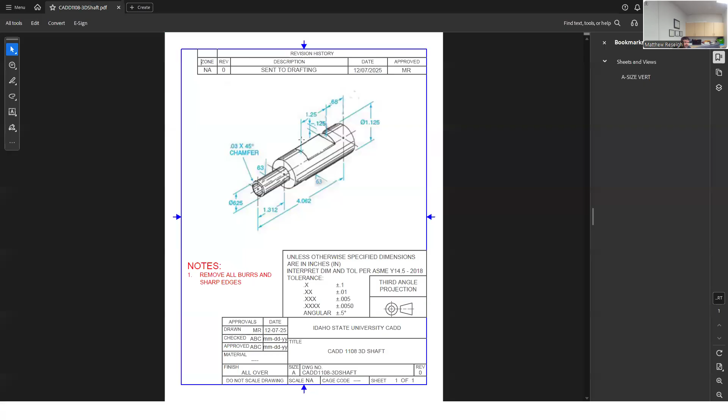So it may or may not have all these dimensions, and I probably will use a few different ones. So I'll just start modeling then and see what I need here. Let me get back to these. There we go. Good, yes good. Okay.

First thing I'm gonna do is just change my line types in here, right? Because I will have had these new MD layers, these model layers that have been created for me. So let's just at least put that to the right line type. I'll do a little bit of line management here, layer management I guess.

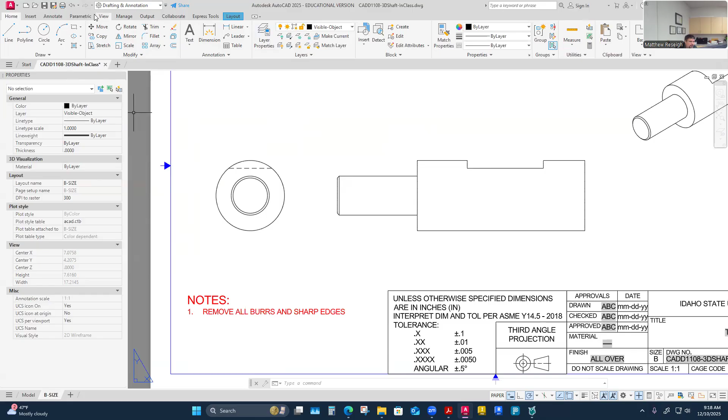I'm just on my annotation tab, not that you have to. I must have been doing some 2D drawings last, so I'm on my drafting annotation tab, which will be fine. I can get to my layers here, but you can always find your layers palette over on that modeling tab too, right? So all I want to do is change these colors and line weights for hidden.

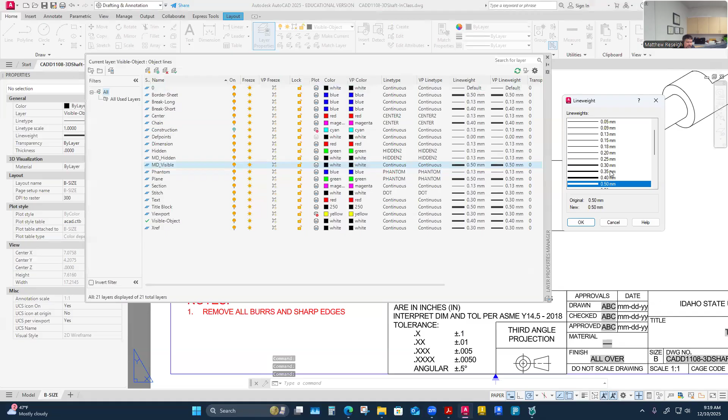I'll turn them down a little bit. That's a 0.13 would be the size for that. And then these would be points for the visible on that would be a 0.4. So just a couple changes there, and then just one color change for hidden lines. And I think that's the only lines I really have in here. Yes, I think so. Ah, that looks better.

Yeah, I'm just matching the other layers that are in there, that are hidden and visible. Yeah, and

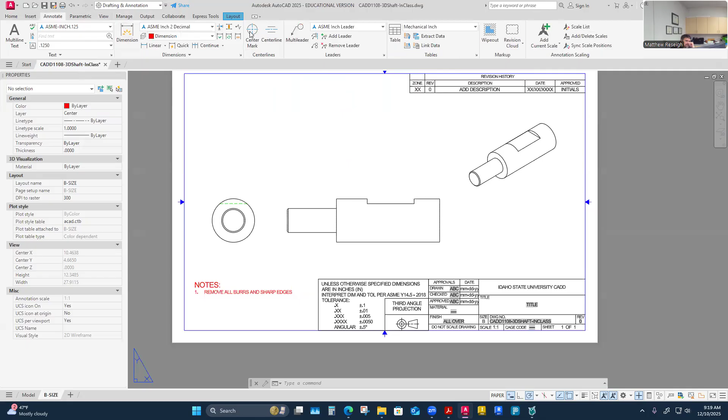Then I'll put some center marks on this thing, right? So I'm gonna do center marks. Manage output, what do I need? Oh yeah, I need annotate and I need a center mark. So there's that center mark, and I just need a center line.

I don't have a full line segment, so I'll just snap one in here. That's the axis of the shaft there. And I'll pull it down to the ends. Then I'll adjust their ASME extensions to be 0.25.

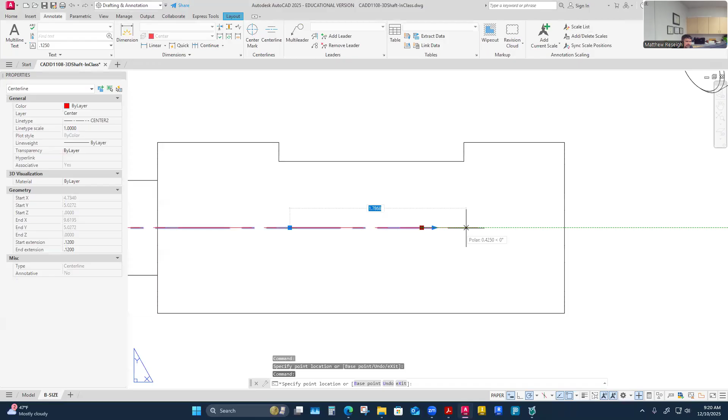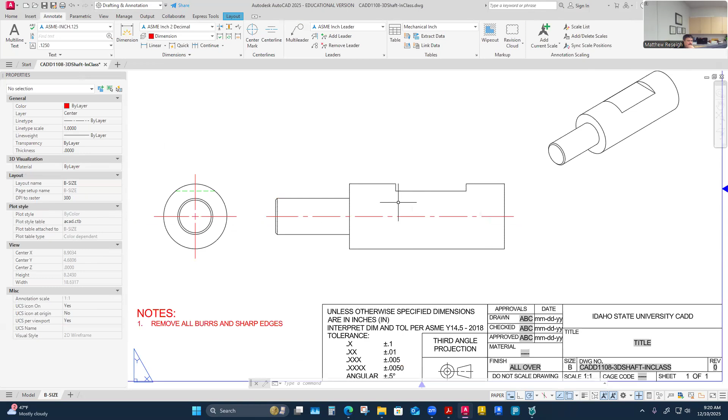Right, and this one, I'll adjust its extensions. Got it, okay. And then let's just worry about some overall dimensions here, right? So I've got an overall diameter, so diameter I'll put in the rectangular view. So I'll probably make myself a little more space here. It's good.

So I'm going to dimension the diameter here. This is the diameter of our shaft. And then if that's not the right dimension, I'll adjust it because it's really says it's 1.125. So I'll take this out to 3 decimal places for that particular dimension. And I need to add the diameter symbol in front of it.

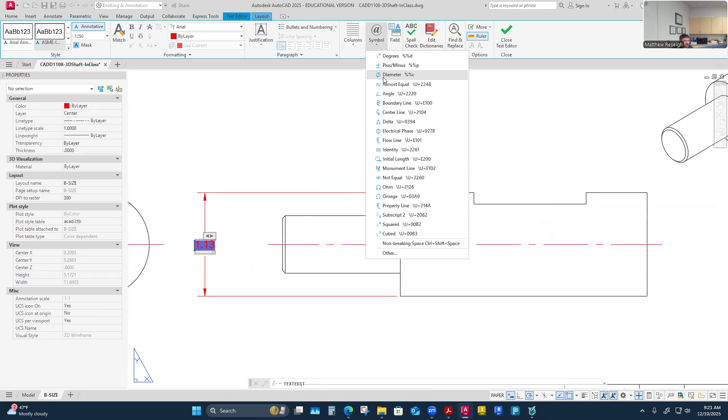And adjust its accuracy, right? I think we just have a few that might be 3 decimal places here.

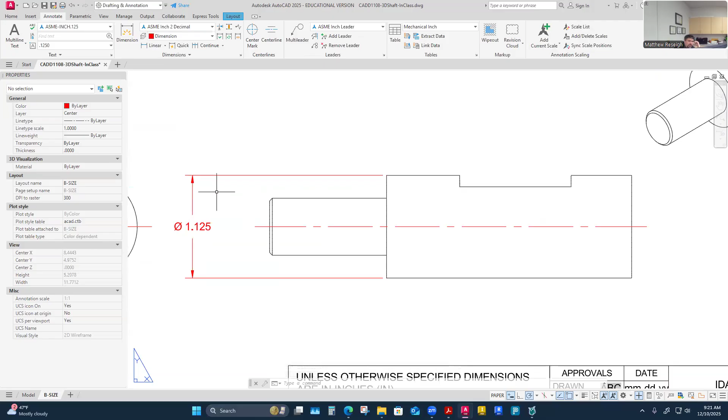Then I need the diameter of the smaller diameter as well. This one. Do it in the rectangular view as well. .63, what is its dimension actually? .625. So it'll really be the same precision as that last one.

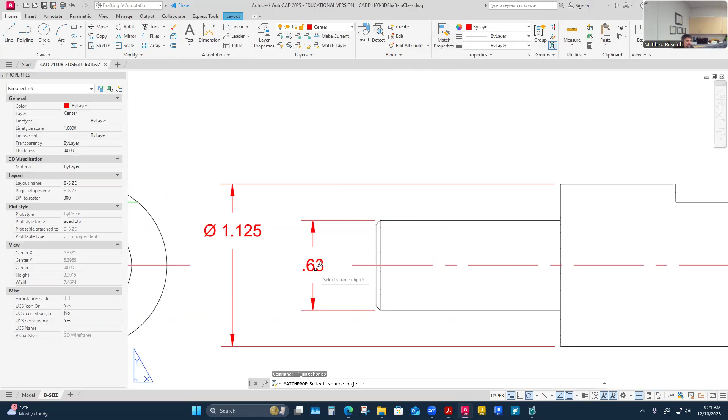Am I doing what? Oh yeah, I probably need to get this not spaced and add it here as well. Yes. I agree there, should not be a space. Just slam it up there like that. Yeah, that looks correct.

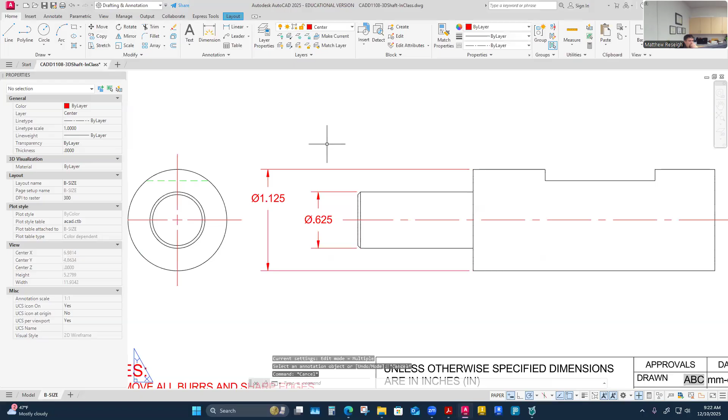And I just need the overall length. And I'll also, this is the only view I have that, so I'll put that in here, just on the up above it. Sure, above it or below, it's fine. Maybe I'll put it below it. I don't know, I'm just thinking I'm going to have some dimensioning here. I don't. I'll change it if I don't like it, but I'm definitely going to put it in here.

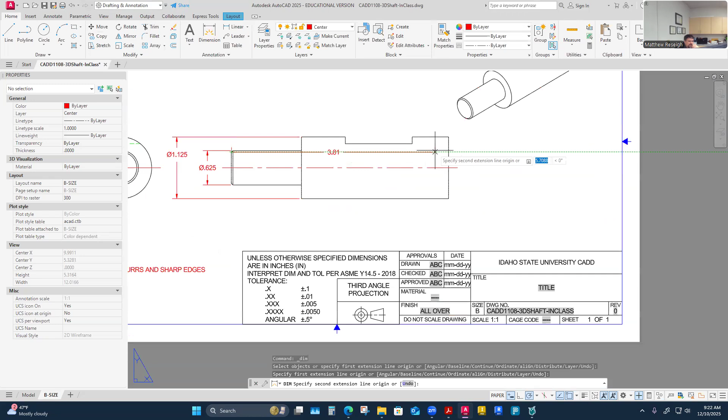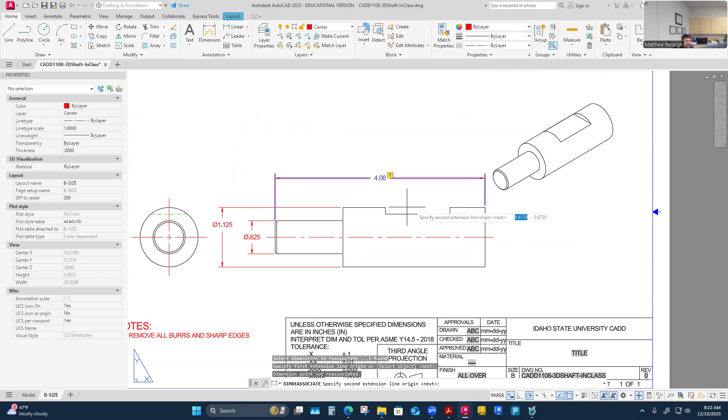Try to adjust this to the right point here. Doesn't like me. But I do like where that one's taken better.

What is the precision of that one? It's actually just 3 decimal places again. So I'll do that, so I'll just match those properties here. I think I can just match these properties. 3 decimal places. Okay, looks like I could have used a 3 decimal place dimension style. That's okay, just keep going.

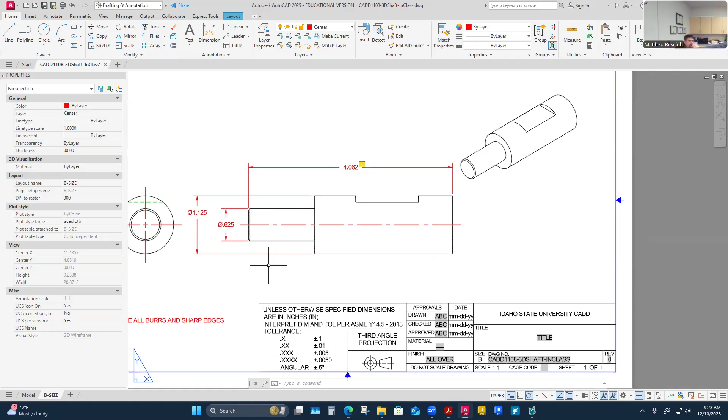So that's overall, that's overall diameter in those areas. I guess overall size 4.062, overall diameter 1.125. Then I've got now I'll start thinking about features, I guess. Feature on the small shaft size is 0.625 in diameter, and I'll put its length in as well. So I think there's a couple different ways I could do this.

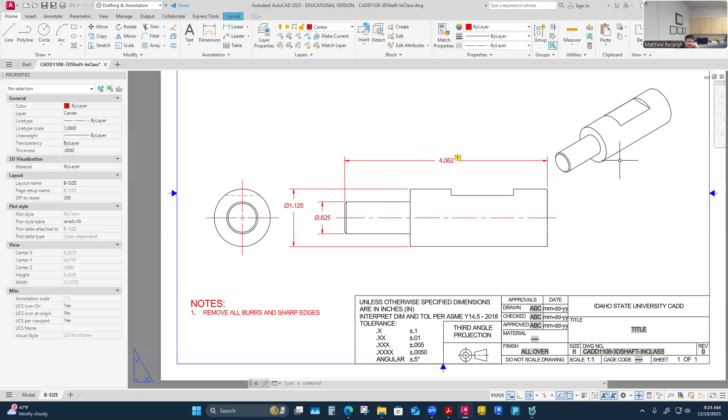Depends on which is critical here and which one. This is definitely a pretty good place to pull dimensions from. It's a nice flat surface on the back of the shaft. Even I could pull a dimension from here. I could use this surface right here as a datum as well, or I could even use this surface here too.

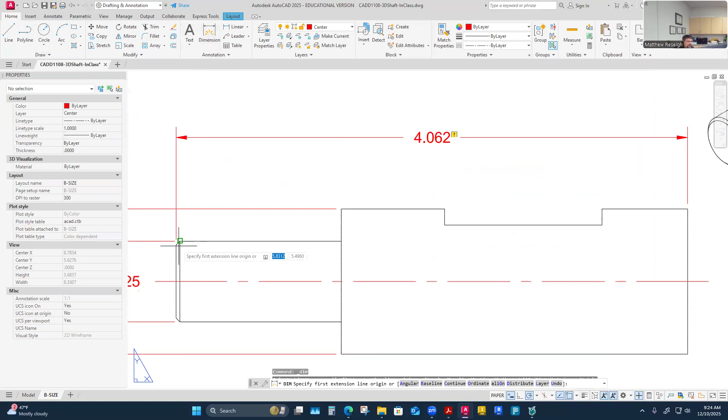So I feel like I can pull left to right or right to left a little bit on this. And I think it might be nice to... what I'm thinking of is kind of the size of this right here, and whether I just plop this. It might be like your intuition would be, well, let me just plop this dimension here, or maybe even above it if that's where I'm putting my dimensions. But something like this to here is what I might want to know.

And I could say that this is pulling from this end surface this way, and that's my datum there. And I think that's okay. I don't want to say which one's better, right or left. This is a bigger surface, so maybe that's what makes it a better datum to pull from. But I think it's arguable that either one would work.

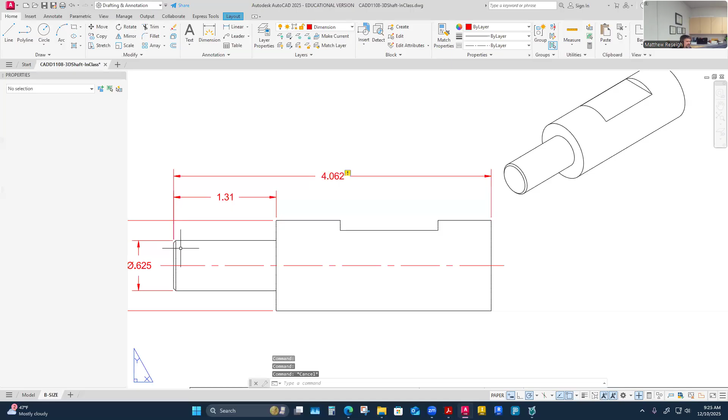So I could view that I'm pulling this dimension from this front face as well, and I'm pulling this dimension from this front face. So I'm using this, even though it's the littler surface, as my datum dimension, maybe.

It's also 3 decimal places on our print there, so it's another one. So that's its length, and I've got its diameter, and I've got the length of the overall and its diameter. I really haven't applied a length to this yet. I could figure it out between those two, or I could give it.

So maybe I'll give it. It's kind of a chain dimension, but it's not a chain dimension that's going to be like 15 different chains, but it is a 2 chain dimension, which I think I'm going to be okay here, like this. 2.75.

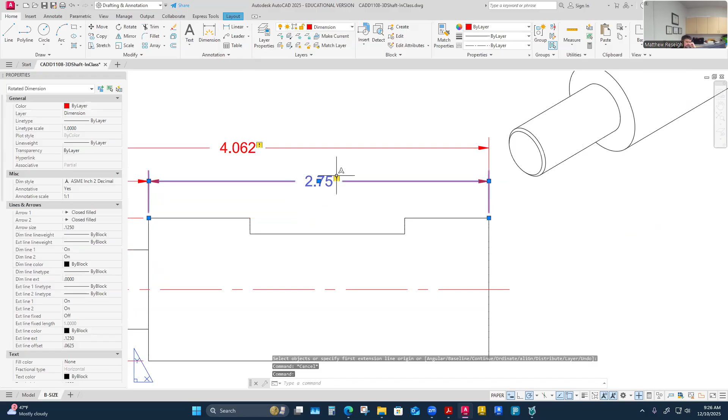I feel like one of these might become this gets into the situation where if I knew which one was more critical, if it's more critical that this is this length, then this becomes the primary dimension, and this one might become a reference dimension. But right now I don't know, so I think I'll just leave it.

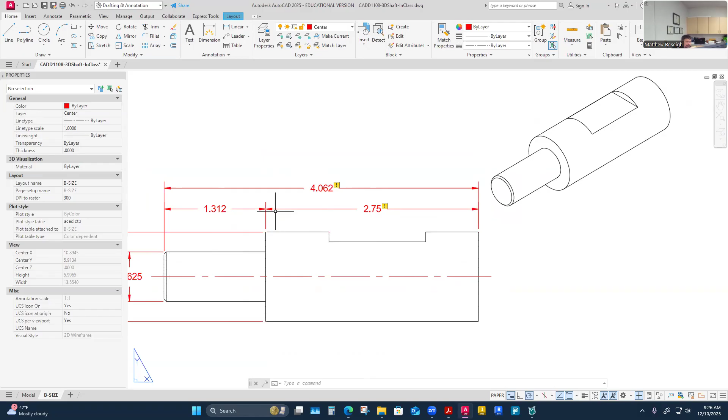What it does is it saves me from having to do a little bit of math, right? Like if technically I have that dimension, I just would have to do some math to figure it. And then I would just have to determine if this one is as critical as this one, or maybe they're both critical

and I might choose to pull them both from the same datum. I don't know. I'm going to leave it like this, kind of as a chain dimension that I have it.

I wasn't given it on the print, and it was kind of something that I would have liked to have had when I was actually building it myself in my model space. I had to kind of do some figuring, or I kind of drew, and then I came back up. And I didn't have that dimension, so having it is helpful. Knowing which one is the most critical one is also helpful, but you have to know the parts' relationship to know that. So at least I've captured that.

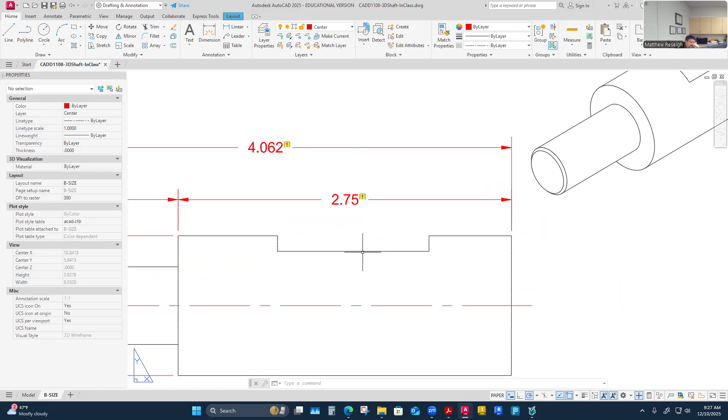And then I'm going to think about these others. So now I'll just keep focusing on this part here and its features. It has this slot cut in it that we know we cut across here. So I think I'll go point to point for those, and maybe from this end here. But it's really me establishing both ends of this part as kind of critical hold points, but not necessarily till I decide that later.

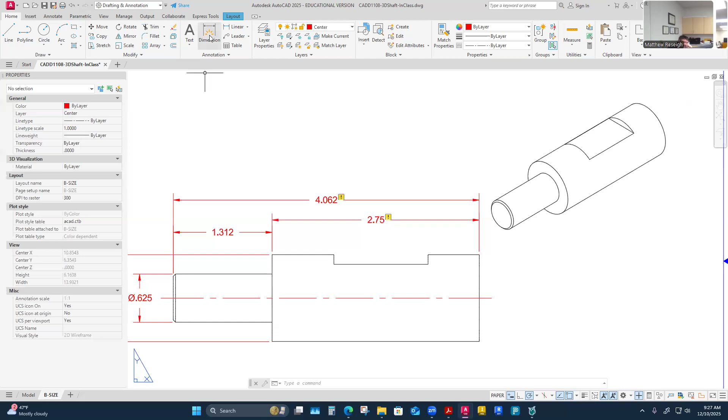So I think I need to know this to here if I'm using that back surface as a datum. So there's one, and I'm going to pull this one to this one. That's my other dimension here.

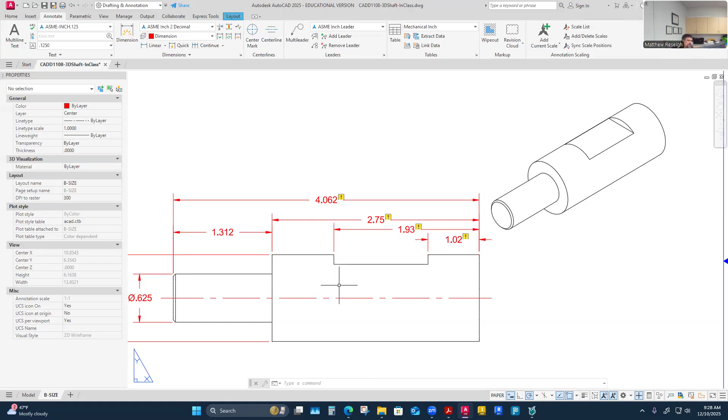Of course, my mind's going crazy. It doesn't like any of my dimension selections, but it should be 0.68. Yeah, so let me fix it here. This is the other problem with some of these is they just don't like to. Sometimes they don't give me the right dimension unless I can get it reassociated correctly.

Sometimes what I'll do is I'll say, if that didn't work, let me try to pull it the other way, even though I was thinking about pulling it the way that I'm thinking of the datum. Let me just pull this way. It's funny that it likes that. So it seems to... oh, I don't know why I did that. That's crazy.

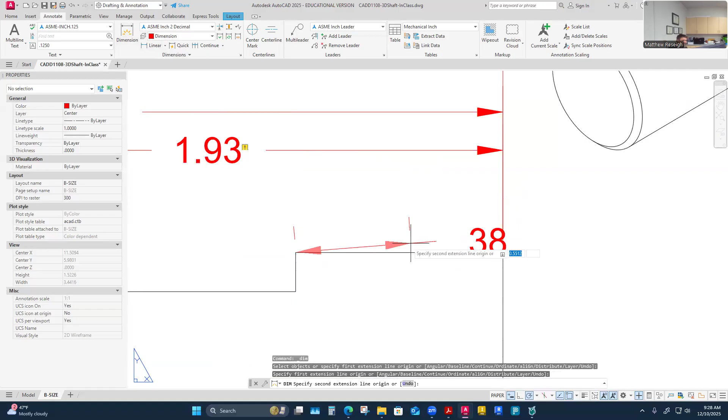Is it when the dimensions are taken from points of an object that are on different planes? Yeah, it could be. There is something going on here that I need to research myself to see what's happening.

I know from the little bit of research I did on it, even last year, a lot of people said dimensions are hard to get totally associated correctly. I found a lot of people online said, 'Oh, we can chase it forever,' or I just turn it off at the end.

There probably is some order of operations thing that I'm doing kind of wrong here potentially, or maybe there is some relationship to the object where I'm pulling from. I don't know, but it's funny that it pulled different dimensions from one to the other, so that's also kind of strange.

And if your computers aren't doing the same thing mine is, yeah, it's totally random is what I've found with most people. So I've kind of just chosen not to try to find perfect, because essentially these dimensions act like your other dimensions on your other drawings.

They're really not totally associated with the part. If you go to move your view in your viewport, I think... well, maybe I don't know. Do the dimensions come? Yeah, I guess it's kind of like this. Some come with you and some don't come with you as well when you're moving your parts.

Unless you're doing a move of all and grabbing all parts and moving, then they'll come with you. But if you're actually just trying to pull your object and not move your dimensions with it, then sometimes you lose your object or your dimension points.

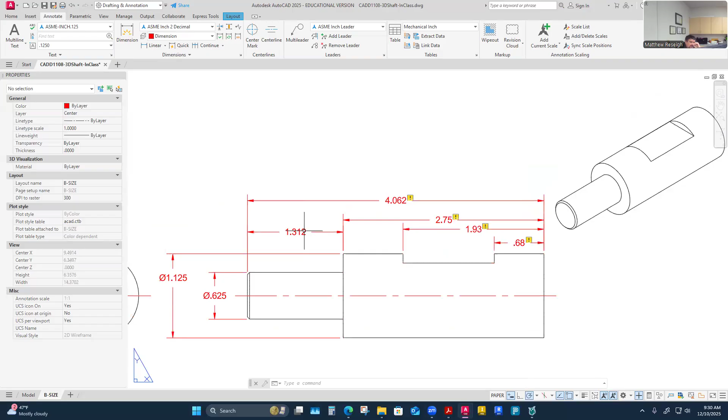This is another situation kind of like I did here, where I gave this dimension even though you were able to figure it out from the difference of these two. I can get this one too from the difference of these two, but maybe I'll just drop in that dimension here too.

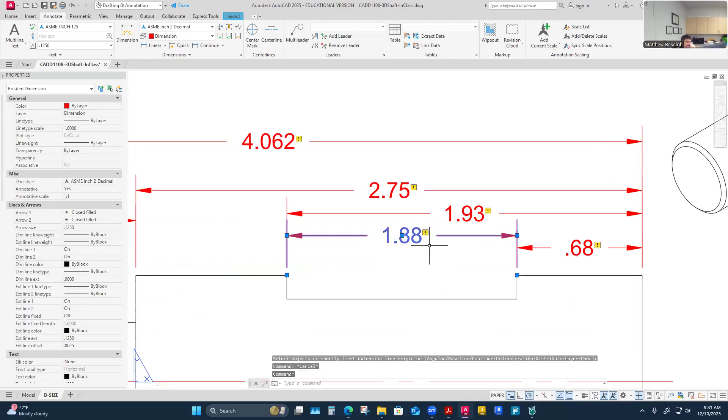Oh, sometimes you have to snap it and then come out. Well, it'll actually, I don't know. Mine's not working for me well today, essentially, is what I'm finding out. I'm going to go check my model, just to make sure I didn't model that incorrectly.

The space between these two, right? I don't know if measure is... if you type in measure, oh sorry, I'm in a command. It will be this one, and then I can pick my distances.

Yes, but it's funny, it just doesn't... I don't see it like I think. Well, I have it on mine because I'm on the drafting and annotation tab, so I could have used that.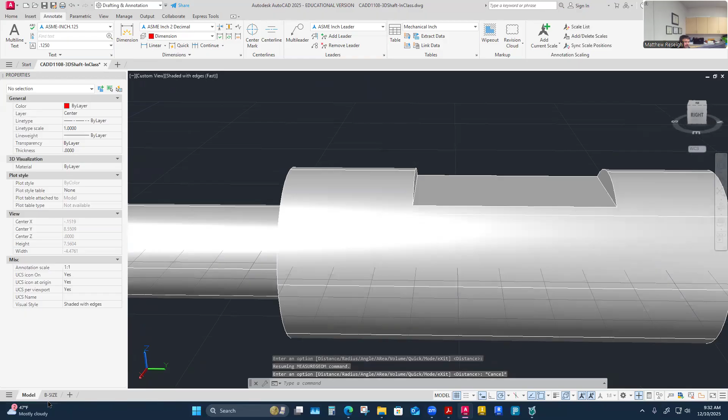That's all I'm wanting to check, is point to point here. Yeah, technically I have the right dimension, but this is being kind of goofy. That one's not happy with me though.

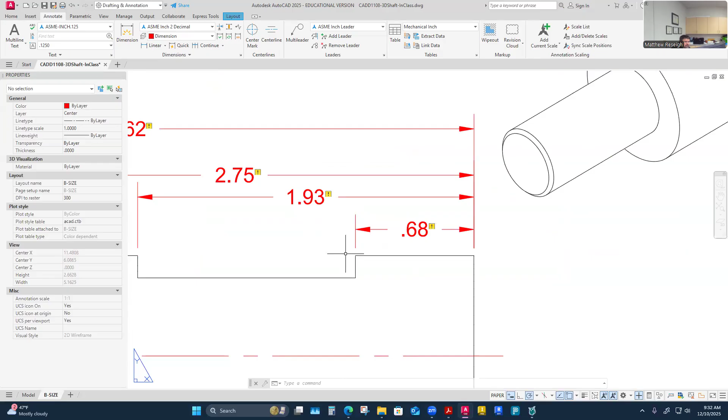And then for whatever reason, it just picks the right dimension. I don't know, that's totally random to me a little bit.

Bear with me for a minute. I'm just going to see if I can... Oh, I did it on purpose here, though. So just bear with me for a minute. I'm just seeing if I move it, will it reassociate? I don't think so.

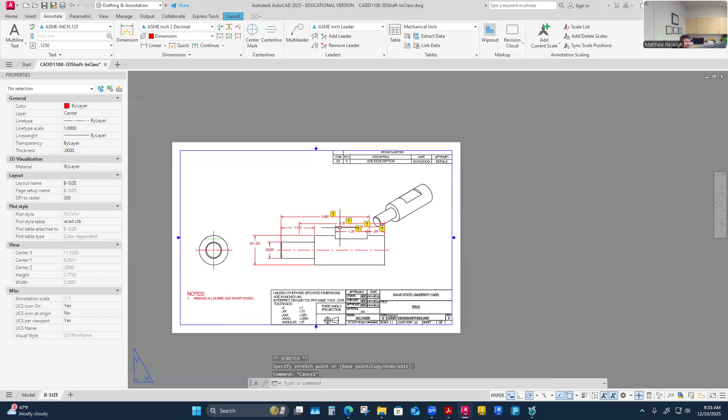Yeah, for sure. If you get it drawn, we have next week. But even if you want to do it after, you can. I mean, we could do it after Christmas too, but I'm going to get mine done too.

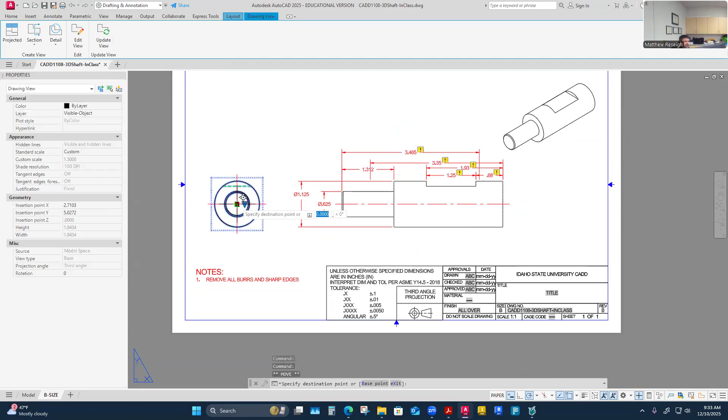I just think I was going to move this over just a little bit anyway, so I'm going to keep moving my dimensions a little bit.

I feel like one of these might become a reference dimension, or even off the other way too. So even though I'm chaining a couple of these together, I think this is a nice dimension to have rather than doing the math.

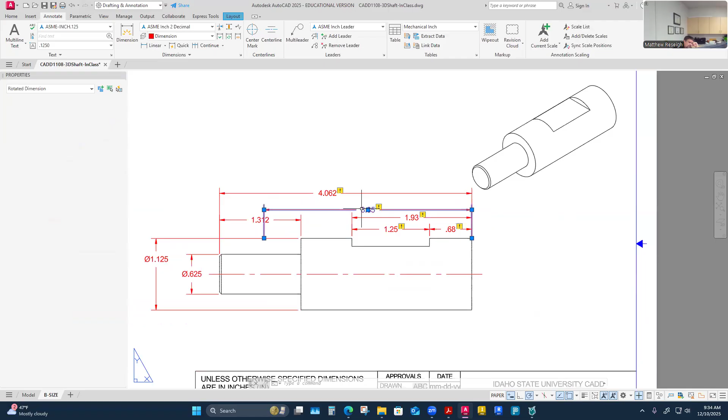Those are all just held to... I don't think they gave me this one, but I definitely think this one pulled from this datum here. What's this one supposed to be? This one's supposed to be the overall, the one that was supposed to help me do some math there. Yeah.

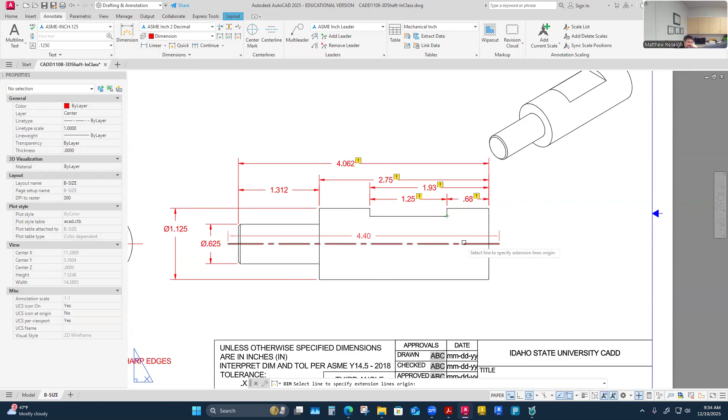I have one more I'm going to do, but I'm going to do it from the center datum. It's just the depth of this. We could establish the very 12 o'clock position of this to be a datum. I think I'm going to pull this dimension here though as my datum, and pull it out the back.

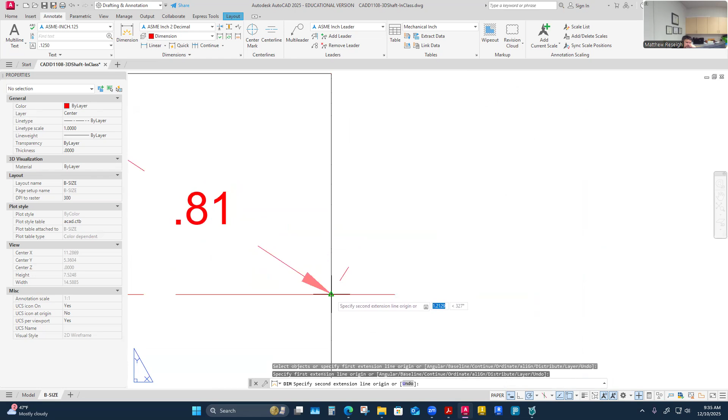I wouldn't want to dimension it here at all to the hidden line. Maybe it's more clear if I bring it up here to be between the two views, but because of the way this end of my drawing is, I feel like I'm going to pull this dimension from here off center to the slot there. Yeah, this is the one that mine did like.

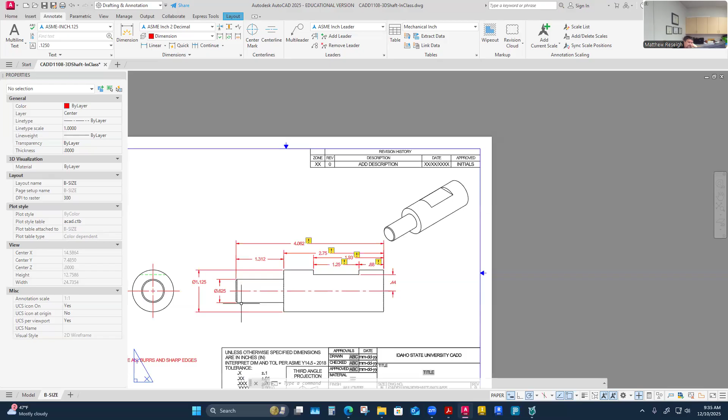I'm just going to do a little bit of cleanup here. I've got one more feature, so that's all these features. Really, it's the depth of this cut.

Somebody asked me yesterday if I need to dimension this, and I guess I would if I had done a section view. I could cut a section through here, and then I would have this exposed, and I could dimension the length of it there. This is going to be understood, I guess, if I have this dimension here and these other dimensions. If I cut across that, it's going to establish that width no matter what anyway, just based off how that.

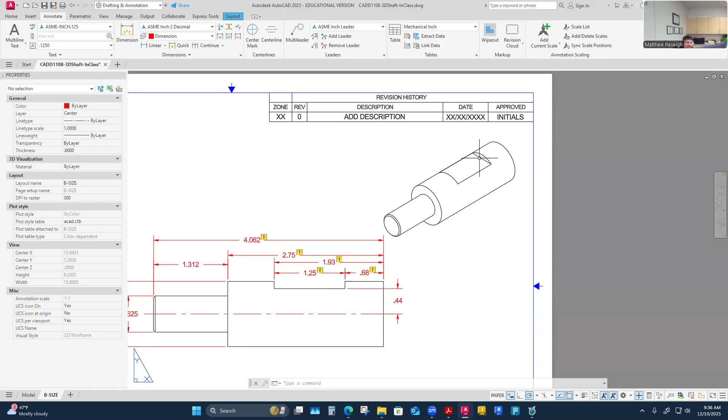For math class, we were talking about chords cutting across the circumference. That's kind of what you got here. This chord is cutting across the diameter, and it's going to establish, if that was a critical dimension, if I did need to have this dimension as a critical dimension, then I probably would want to section this so that I can dimension this length right here, because I wouldn't want to dimension it right here.

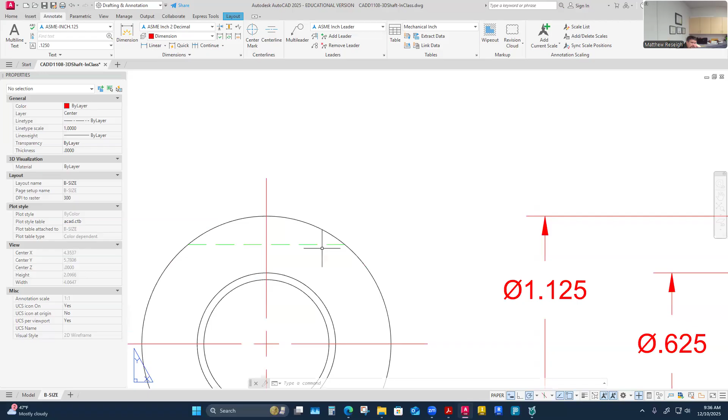So if there are critical features that need to be dimensioned, that's why a section view is going to be our friend there. So what I'll do is demonstrate that, even though I'm not going to use it. I'm going to use this as my driving dimension, and this, and potentially this and this, as my size and location dimensions really.

And if this dimension was really user friendly, which it kind of is, like this is only an eighth of an inch here. If this is a pretty user friendly dimension, it might become a reference dimension. Nice to see what that roughly is, maybe in parentheses, overall.

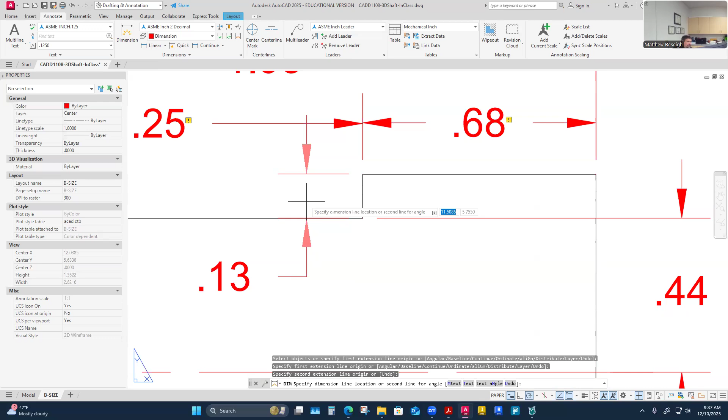So I think at this stage, a semester in, what you decide is there can be a lot of variation in how somebody chooses the dimensions they put on stuff. And then sometimes as a drafter, I can do a lot of dimensioning, kind of get a feel for what the part is, maybe then go talk to engineering and be like, well, I don't know the relationship of this part and how it works.

So what are the critical dimensions? Which ones are going to be reference dimensions? That's a conversation that can happen, and it helps you build the relationship with the part. You can do a lot of work like this.

I would continue to add these dimensions, and then maybe go have a discussion, print it off, go have a discussion, and be like, hey, what are the critical ones here? Sometimes experience will help you know that, if it's a part you've designed over and over again, or you learn how your equipment, the way parts work on the equipment you might be designing for.

So some of this, you might be able to inform yourself on which ones are critical dimensions and which ones are just going to be reference dimensions. So where I leave some vagueness here is always just because these conversations need to happen.

And maybe that is something that I would do on occasion, was just spend my time getting... I can put a lot of dimensions on here that I know I need. And then I can, like I said, print it off and go have a conversation on which ones we don't need and which ones are confusing or something.

You always think as a drafter, when in doubt, just plaster everything on there. And that just gets a little too busy. So I hope by this time in the semester we've learned to be a little systematic in our approach to which dimensions are needed, and then trying to find which ones are in that gray area.

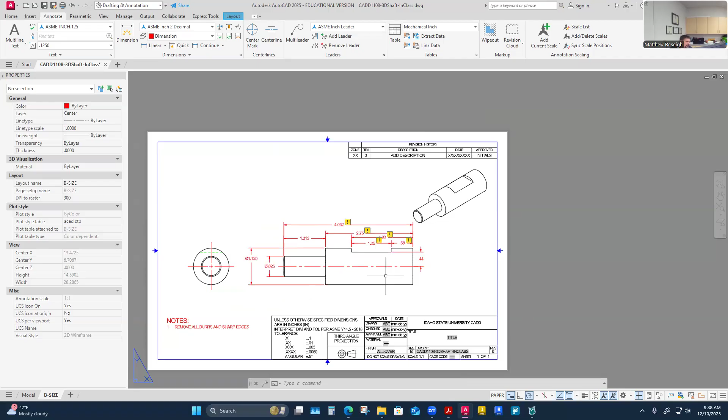Like this to me is that gray area - what are the critical dimensions I need to have here for this particular feature? And so that's kind of like, well, I don't know, I need to find out maybe. But at least I have them all put on there, and I can make a quick adjustment once I have a conversation. Oh, add some reference dimensions. Oh, maybe omit a dimension here or two. But I wouldn't go talk to an engineer with probably nothing started. I'd probably be like, okay, which dimensions do I need on this?

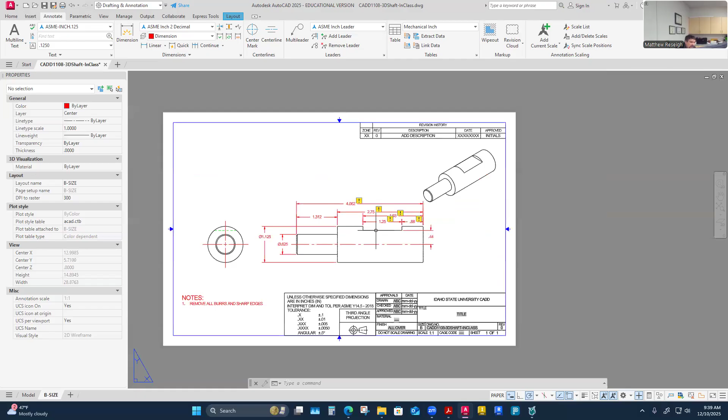No, no, no. You can do a lot of work yourself getting dimensions, and then you can have kind of like a conversation with specifics, not just a whole general discussion. At this point, we should be able to know quite a few dimensions that we need, if we just think of size, location, and features of parts. There's one more feature I have here, and that's that chamfer. So I've kind of locked in some of the dimensions around this thing, and then I just need to know this chamfer dimension.

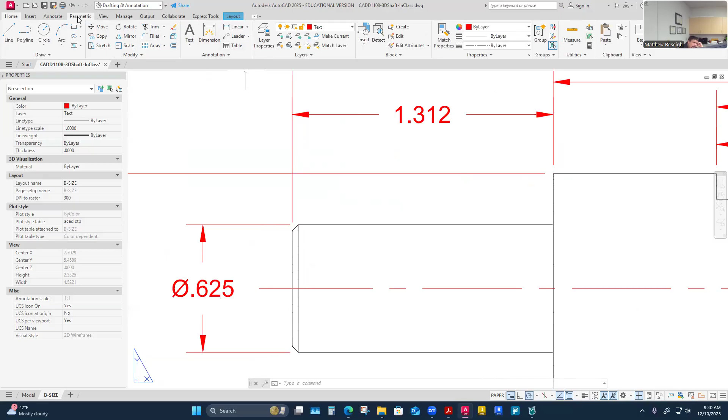And so we can use a multi-leader for that. I'll just put it on my text layer - so I'm on my center layer, I'll put this on my text layer - as a multi-leader text, which we should be using. We have a multi-leader that's kind of, I don't know what else parameters were, just that it's loading our text size, and that's the most critical thing here. And I think that the shoulder meets the middle of the text, whether it's left or right, like it shows here. So there's just a couple things that have been formatted beyond just the default settings of this.

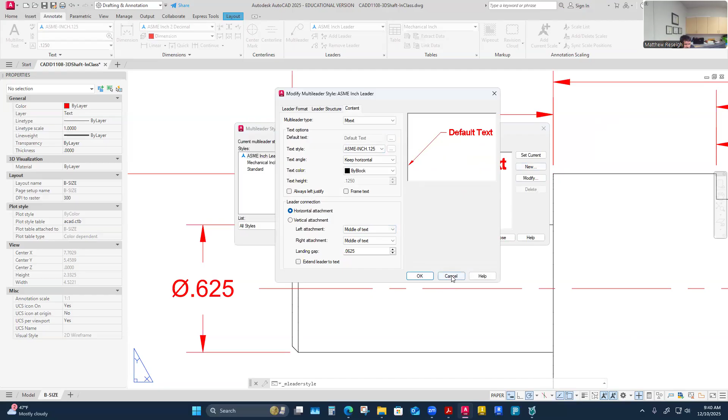So as long as I'm using that ASME inch leader, there should be a built-in leader style. That's what I'm going to use. Multi-leader - I'm just going to point to this thing. Sometimes I point right to the center line of that line segment. I'm just going to pull this off this way. And then I'm just going to add pretty much the same note. Usually you might put the size of the chamfer and then the degree of the chamfer, which is I think how they notated this right here, right?

Yeah, like this is pretty common - sometimes not even having the word chamfer, sometimes just that 'by 45 degree' and pointing at the obvious on the part. You can probably drop the word chamfer. We could add it, that's okay, but sometimes you'll see the chamfer word is not necessary because it's obvious that's what it is. So it's just that I need the size and maybe the degree. And sometimes I don't even need the degree - sometimes it's just a 0.03 chamfer, somebody might write.

Inventor is preloaded - it's kind of like your diameter and radius dimensions that you have preloaded in CAD that'll already apply those symbols. Inventor has it so on a chamfer it will notate a default notation for chamfer. So that's kind of handy. It's like a dimension that it understands to put on.

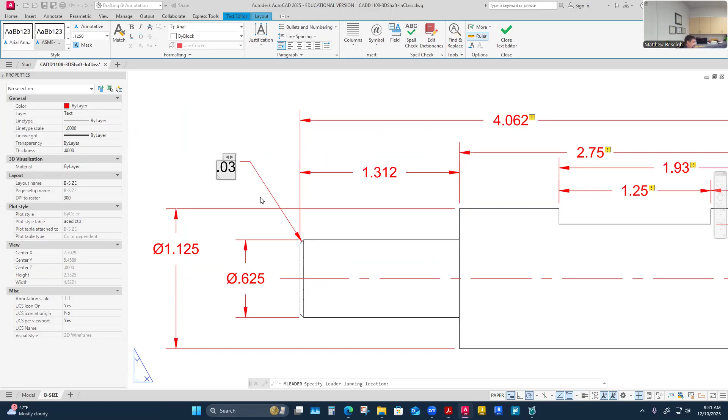So when we get to that next semester, we'll see what the difference was. But for this part, I think I'll just do it's a 0.03, this is by - capital X - 45 degree. A degree is a symbol that we have access to right here. And then, yeah, if you want to add chamfer underneath it, I think that's fine.

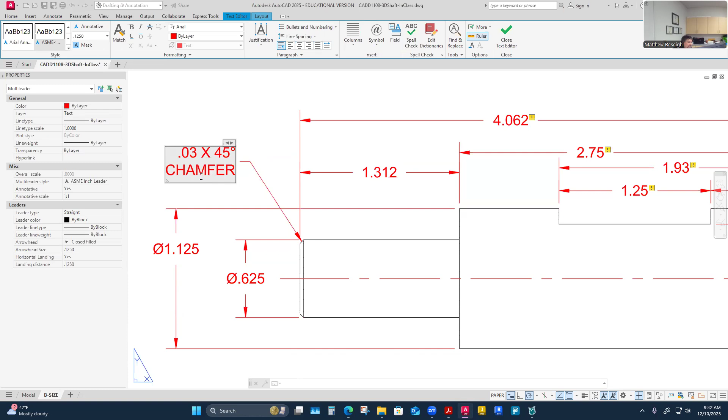Oh, I shouldn't have center justified that - it messed it all up. Sorry, go back to this maybe. Oh no, now what am I doing? I don't know, back to this. This will be good. I'll leave it like that.

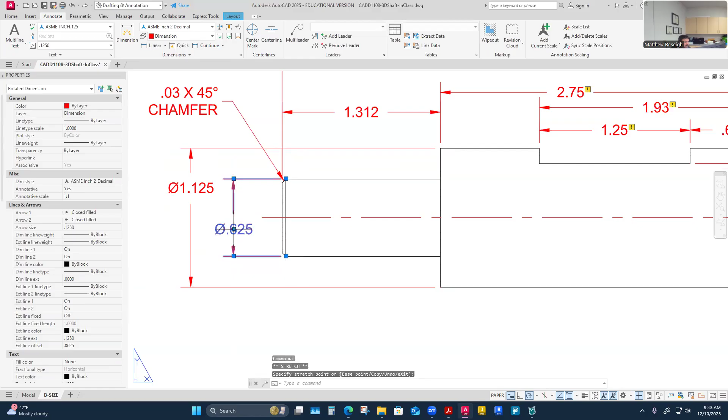And I just need to do some spacings here. So I think I just need to start adjusting some spacings - 375, that's a little. I'm going to pull that away just a little bit more, maybe like that, maybe not that far. I'm going to tuck this one in though, this one to this one. It's going to be a little too tight at the normal spacing, so I might just offset this a little bit more staggered, something like that. Okay, good, happy there. So I'm going to stagger these next.

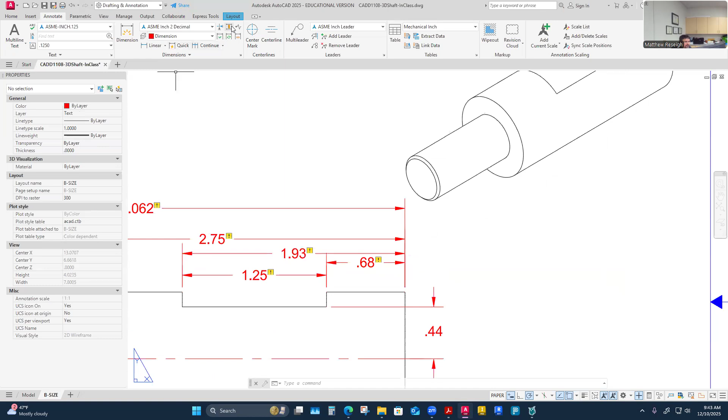Yeah, this is the way I'll organize this here. Just this one to this one to this one to this one. I'll try 0.25.

Sorry, that wasn't the correct order of operations. This one to that one to this one to this one. 0.25. Okay, I like the 0.25 spacing there.

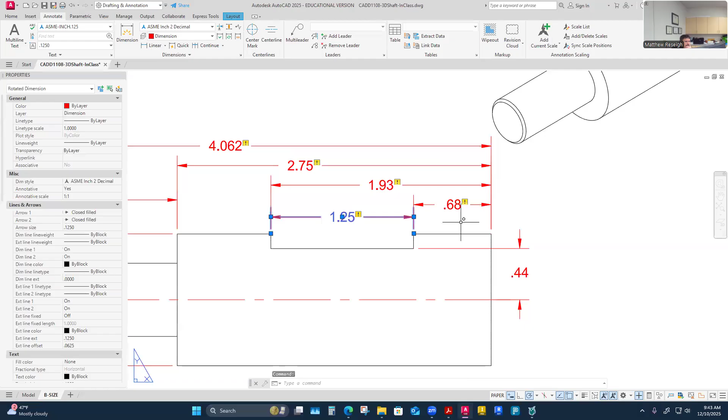So I'm gonna use these as kind of a chain. I like to actually chain these when they are kind of on the same features that I'm looking at here. So I'm gonna chain those together.

One might become a reference. Yes, I'm gonna chain maybe this one together. So I know that my rubric always says no chain dimensions, but there are a few times like this where...

I will chain them together, so it looks good, it looks clean. It's technically a chain dimension, but one of them is going to become a priority dimension probably, and the other one's going to become maybe a reference dimension. So it's likely not that I'm going to drop any of these.

It's just that I might change the priority item, which one's priority. But I think this is pretty well established for. Let me just double check if there's anything here.

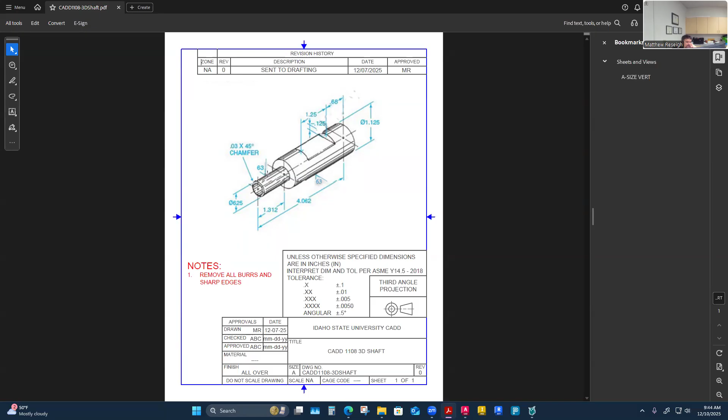I know we've got some surface finishes we'll talk about next semester, and other than that, I've gathered all the data that I needed to build it, plus I've added a few extras that would have been nice to know to build it. The one thing is, you have at least one other dimension. On the very right side dimension, the depth of the slot, that's...

Three decimals of precision. Oh, right here. Yeah, oh yeah, because I got you. If I'm even using a different dimensioning method, I see what you mean. If I'm dimensioning it differently, I should still hold the same precision.

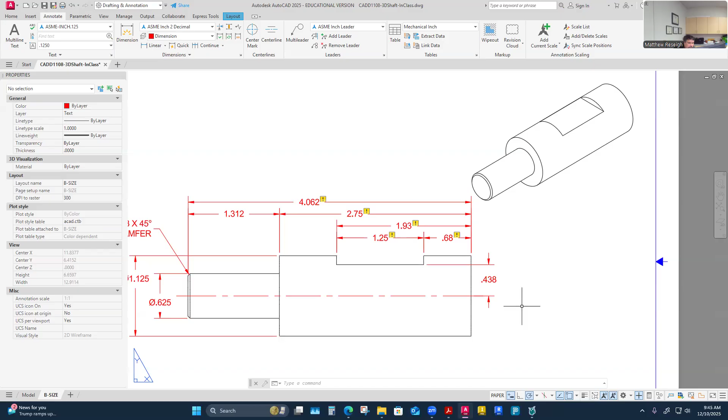438, it's probably 4375 actually, huh? If I really took that out to four decimal places, it actually probably is a nice number. Yeah, 4 decimal places, but that's good. Yeah, I get what you're saying. Technically, the slot was at 2 decimal places, so I should be holding, if I'm dimensioning the slot this way, hold it to the same accuracy. Yes, love it, it's good.

This one could move around a little bit if you need to. Yeah, this could move over here too if there's clearance, and then it allows my reference sheet to...

I try to kind of stay in the vicinity of not... I would hesitate to move this over to this side of the view. I mean, even if I have space, technically as I'm not projecting, it almost kind of misleads the viewer that I'm projecting from this way, which would actually turn it this way.

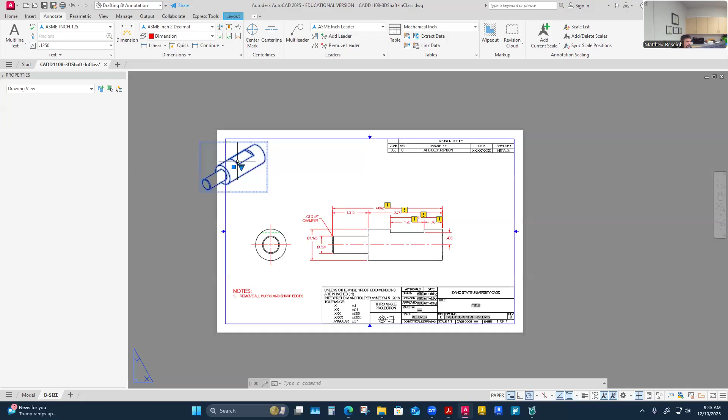So I try to keep this. I think some drafters don't care about this or not, but I try to keep that in relation to where it's projected from, so it makes sense, right?

So something like this, I think will work good. If I don't love those annotation monitors, they're nice to know, but I can also just turn them off like that, and I feel better about my life.

There are no dimensions here. I'm still going to keep it as just this visual cue though, and I think this is quite common on a lot of round cylindrical shaped parts like shafts are.

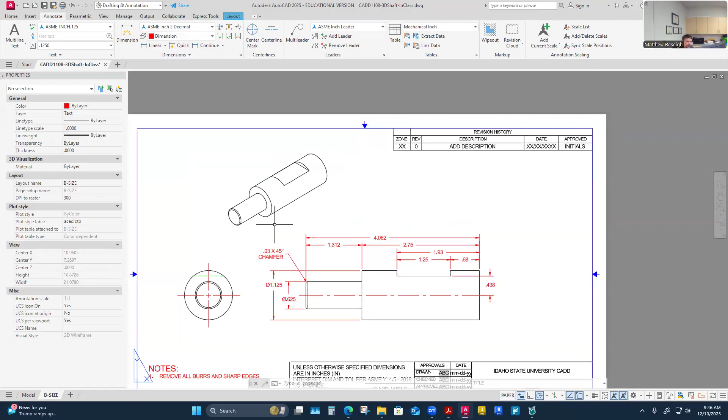I just keep a view, and it's usually my front view that is, but you might find that a certain drafting department says, nope, we're going to use this as our front view because it's the longest. And so they would kind of follow maybe the rules of the longest width here, and so they might call this their front view.

And then they would want to plop this view over here as a right side view, and I'd be okay with that too. I would kind of do as, when in Rome, do as Romans do. So if they choose to do their shafts' front view as their long linear view, then that's fine, because I can get behind that pretty easily.

I tend to do it this way a little bit because I also think of round cylindrical parts that we do a lot as mechanical, like flanges. Flanges are just round plates a lot, and we tend to do those front views so we can see the good part detail, and the left side view on a plate might just be the thickness of it.

Like we could have done our seal plate, parametric seal plates. We could have shown a right side view that would have just been the thickness of the plate, but we kind of chose to show the profile of that seal plate as the front view. So I kind of keep that concept here a little bit, but...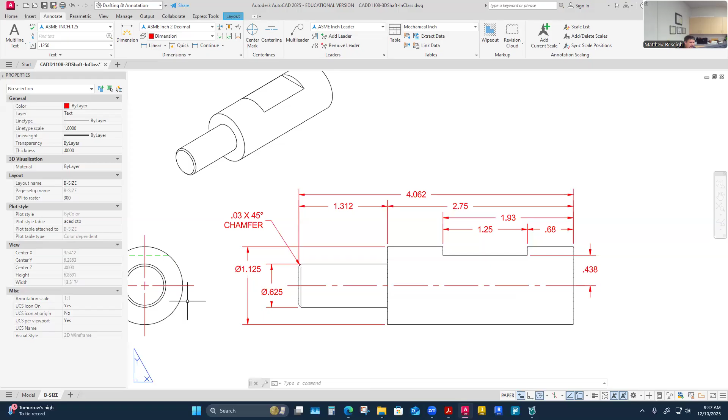I think the book shows both ways, and I think that's just because in the industry it just might vary a little bit.

But I'm going to call this part two after I finish just a couple of title block stuff, right? This is now the 10th.

Oh no, I'm running out of days to buy any Christmas stuff and have it shipped to me in time.

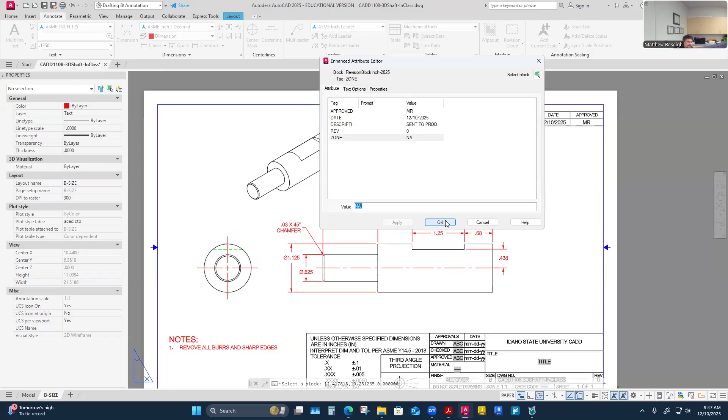Or for the porch pirates to steal off my porch, probably. I haven't been victimized too much, and I'm on the corner of a street that would be so easy to rob me. Just surprised I haven't. Maybe it's just too obvious. There's no clear coverage. Something's keeping me safe. But I say this now, and everything's gonna be stolen this year, probably. Yeah, now, but you're out here. Exactly, I don't watch very well either. I leave my stuff out there for, yeah, exactly.

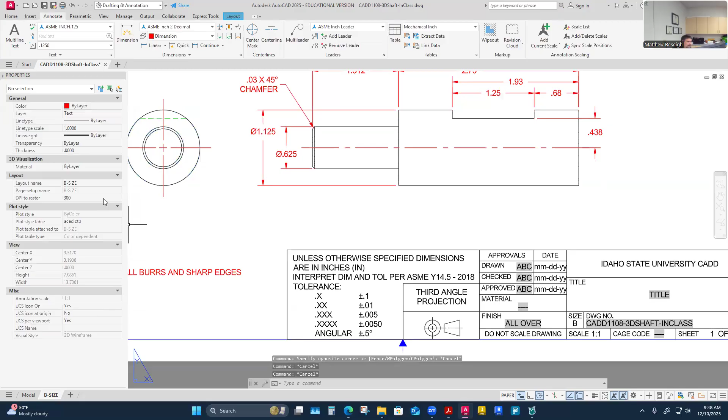I just need to check what my scale is here. I think it's a 1.5 scale. Remember to just check your scale. I just click a view, but parent view generally, I'll go to my edit view to bring up that scale right there. It'll show me what the scale is. I don't know if it shows me in my properties panel what the scale is. It does actually have it right there. So it's kind of handy if you have your properties panel up, you click your view, you'll have a custom, you'll have the scale listed there. So it's kind of handy. Like the properties, if you've learned, I don't ever usually draw without my properties panel up. There's just too many controls in there that I need access to.

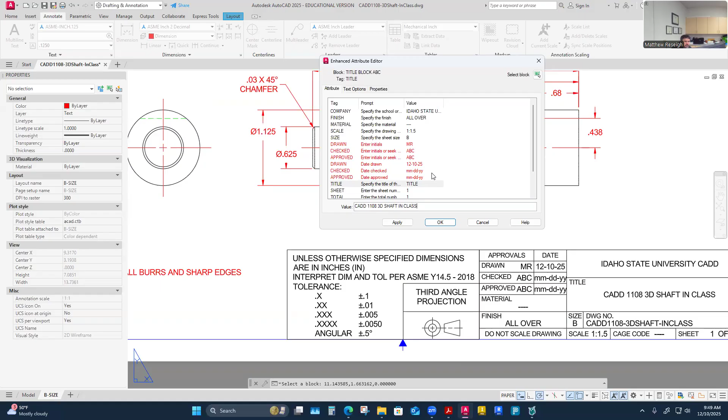1210, 25. I just need a title on this thing. This one's 3D shaft. Yes. In class for me. Okay. That thing's ready to print.

Check my PDF. Check my line weights. Oh yeah, they're popping, they're good. Oh, line type scale. I could definitely adjust the line type scale. That could break up a little better. So these things I don't always notice till...

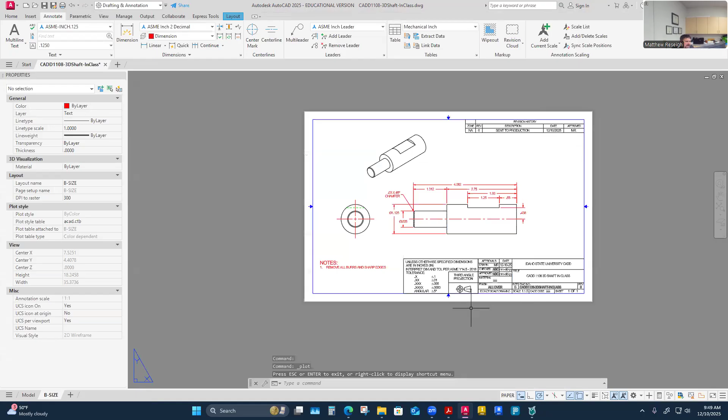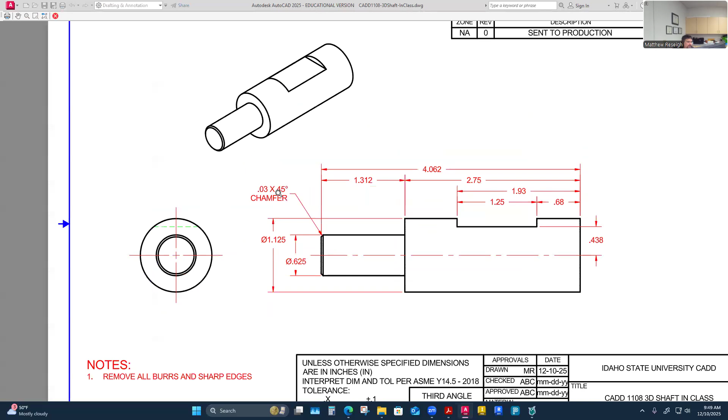The only other thing I kind of noticed about that, I did put my multi-leader on my text layer, which is a little bit thicker than dimension layer. I could be wrong, I could put that on my dimension layer actually. Like the text is going to be the text. But now that I think about it, this is what caught my eye. So maybe I'll change this. If I go to my control P again and look at my preview and then just flex this a little bit so I zoom in, you'll see that this does go beyond the thickness of a standard dimension line and goes to like a text thickness. So I could change that. I think the text shouldn't be, yeah, I think I'm going to change it to dimension. Like technically I'm kind of using it as a dimension. So maybe it's better to say it's actually on my dimension layer.

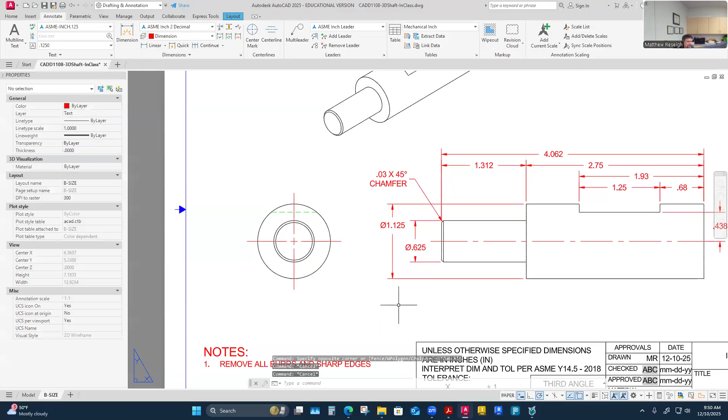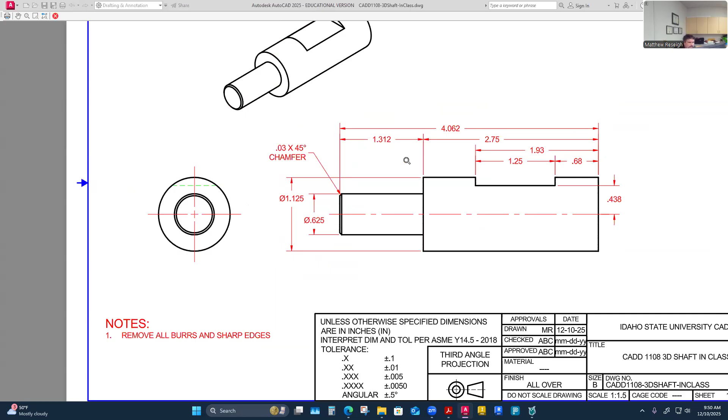This is a small detail that probably wouldn't really stand out to you unless you plotted it or printed it. But now when I check this and do this flex, this is how I check mine, preview that, zoom in and zoom out so you can see how the line weights are going to be affected. Now I'm going to get my leader line to match my other dimension lines and not act kind of goofy. It's going to plot and print like this, actually, is what it's going to look like. That's good, and that's a small detail too, but I do like it. This is good. I think you've seen a lot of dimensions, or a lot of images in our book that probably haven't done that, but I do think it's good practice, especially since we have a quick way to do it. So I think that's a good thing to break.

This one here, right, the one that I choose to break around this one. Not, I want to do the other way around. I always forget this, is probably better. This one around this one? Yeah, that's better. Oh wait, that's still not right. It's the other way.

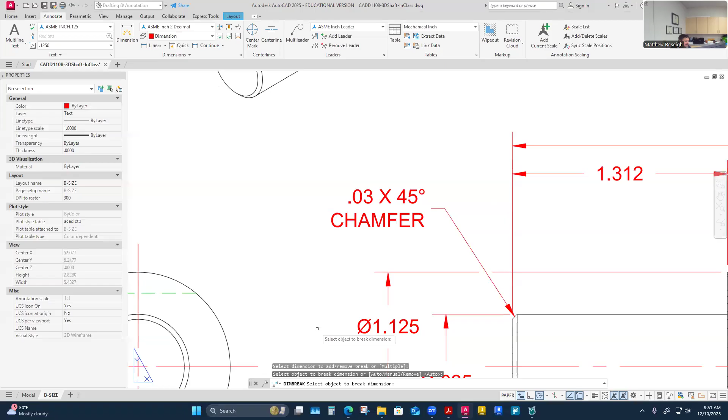Extension line, that extension line around this one. Oh, I like that better, actually. I mean, technically, they're both extension lines, so either one would work fine. The only one that I usually prioritize is when I'm cutting across a dimension line, I'll definitely try to keep it and go ahead and cut the extension lines and let the dimension lines be. But in this case, these are both kind of extension lines, so either tomato, tomato, maybe.

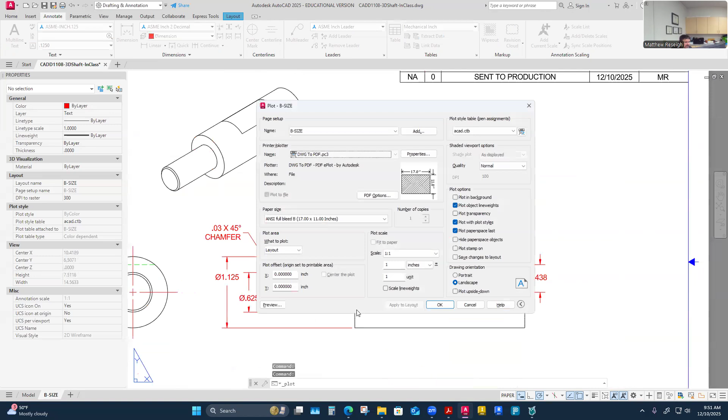Okay, either way, I'm going to save my PDF now. Last preview, yeah, it's clean. Let's save it. And then I'll stop this one. Okay, I do need to save one copy though. I want to save that, just that.

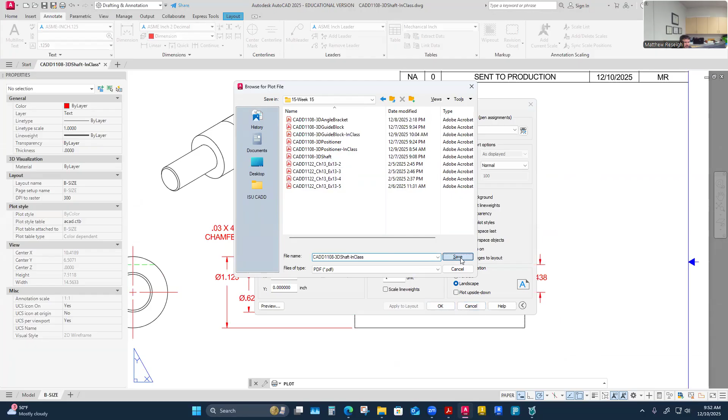Excellent, good, I got myself some new updates this year too. Perfect, so I'll stop that one and then we'll jump into just doing some art. Heck yes.